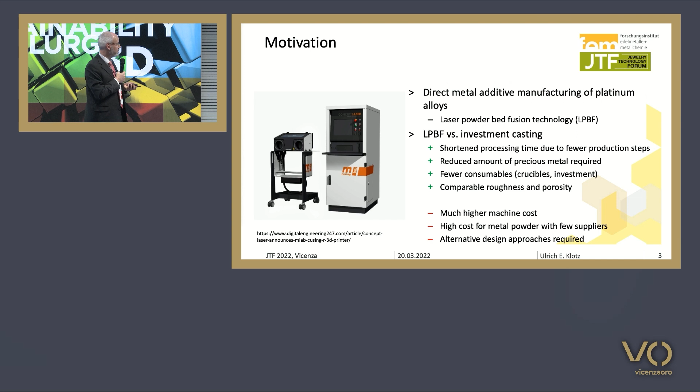So what did we do in our study? We wanted to know about the effect of the alloying composition. To study this, we used sheet material. We prepared small metal sheets that we put into our machine, and we applied laser tracks on these sheets.

This is much easier than producing a powder. Producing a powder means a very large effort - you need a relatively large amount of metal to melt - and therefore we went this way by using laser tracks on sheet material.

Then we used a commercially available alloy by C. Hafner to do some laser powder bed fusion experiments. We did a small parameter optimization, and I will show you an example about how the support structures are influencing the result that you obtain. We did a small optimization of such support structures, and of course we did the characterization by microstructure and porosity, and manufactured some jewelry items as examples.

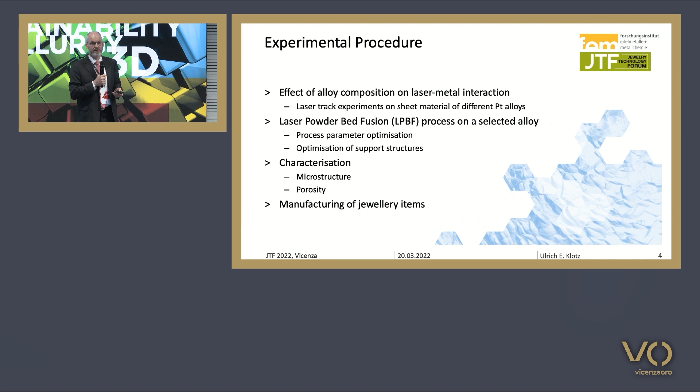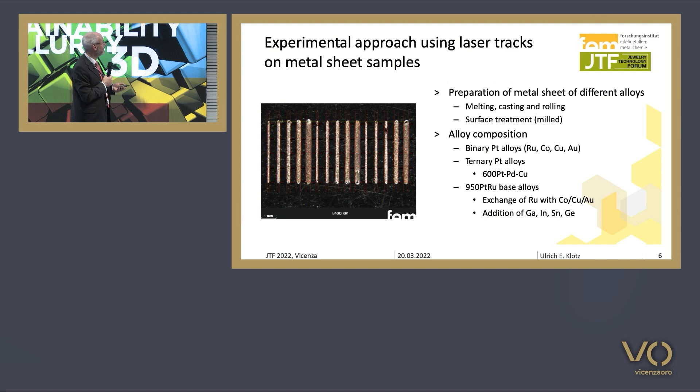So this is our approach using laser tracks. This picture shows you platinum alloy sheet with different laser tracks. We used different compositions, binary and ternary alloys, and several 950 platinum-ruthenium based alloys. You see the laser tracks have different thickness, which is depending on the laser speed. All tests were done at the same laser power.

So the smaller the speed, the wider the laser track, because more energy per time unit is applied onto the material. We measured the width of these laser tracks, and also did cross sections to measure the depth of the laser tracks.

Of course, the way the material reacts depends on its physical properties - the melting range. Usually the lower the melting point, and the wider the melting range, the wider and deeper the laser track is. The same is true if the reflectivity is influenced, or if the thermal and electrical conductivity is influenced by the alloying elements.

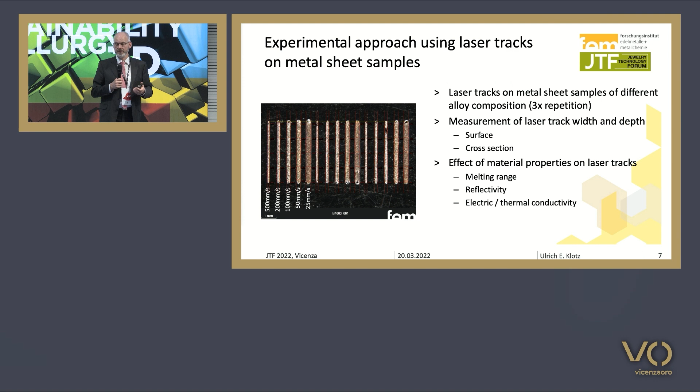Here's an example of how the line width of this laser track depends on the laser speed. We see what we saw already in the picture, that with increasing laser speed, the laser width is decreasing, and the process gets more stable, because the scattering - shown here by the color range as maximum and minimum values - is reduced. Here we see a cross section: the sheet material, the deformed sheet material, and here you see the cross section of the laser track.

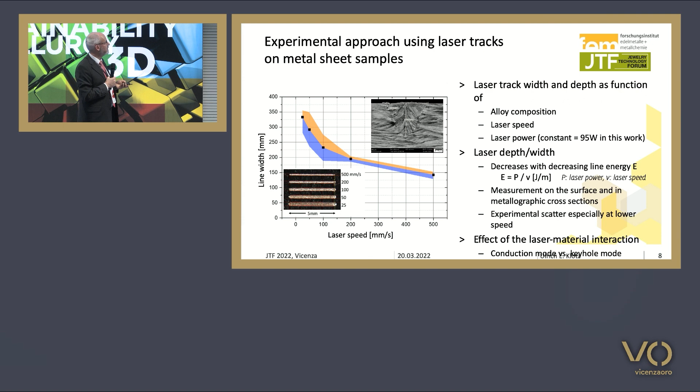So we measured these values, and we see an effect of the laser material interaction. There are two principal modes that are distinguished: the conduction mode and the keyhole mode. I will show you an example of how this looks exactly.

Here we see a very small laser track with low depth. You see the scale is 40 microns. This is a typical example for the conduction mode, done in a 600 platinum alloy with palladium and copper.

If the copper and palladium ratio is exchanged, here we have 300 palladium, 100 copper, and here 100 palladium and 300 copper. The copper-rich alloy shows a much deeper laser track. This is a typical example of the keyhole mode, and here the scale is even higher, so this laser track is really much deeper.

If we plot the width and the depth, the blue points are the depth determined from the metallographic section, and the orange points are the width. We see the width is more or less constant, but the depth is increasing, with a maximum at around 20 to 30% copper in these platinum, copper, palladium alloys.

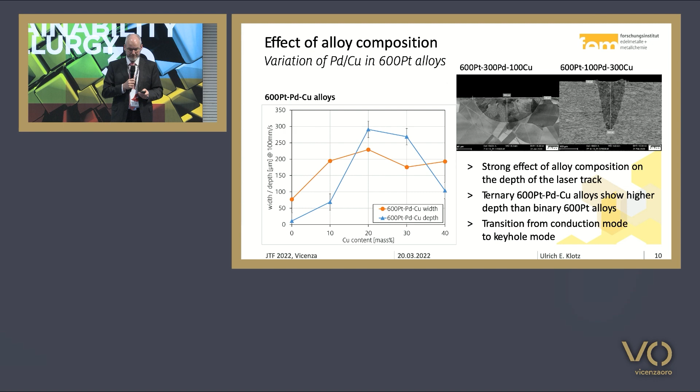So we see that the alloy composition has a strong effect on the depth of these laser tracks, and this is important because we have to melt layers together, so we have to assure that each layer is melted perfectly to the layer below. But if the energy input is too high, we can get porosity inside the material during the keyhole effect. Now here are some other examples.

We used several ternary alloys based on 950 platinum ruthenium. In this first graph, I show some examples with high melting additions. We used copper, cobalt, and gold, replacing some of the ruthenium. On the left side is the platinum ruthenium alloy, and on the right side are the platinum copper, platinum cobalt, and platinum gold alloys.

If you look at the triangles, the depth is not affected by copper, but we see an increased depth if we add some cobalt or gold to this alloy. We have not fully understood the physical reason for that, but I think it's an effect on the solidus and liquidus temperature that results in a certain melting range by adding these alloys.

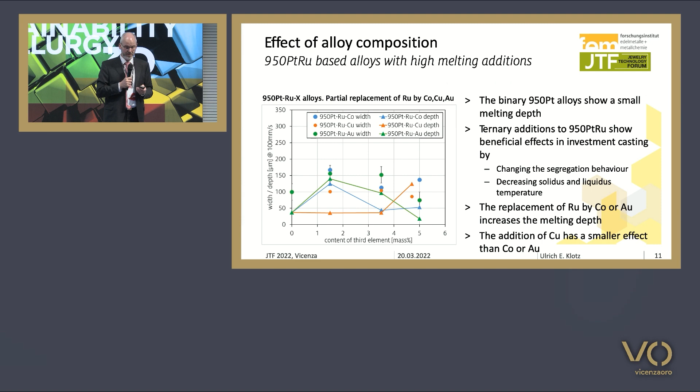So I think these are interesting results when it comes to fine optimization of the alloy composition for such applications. Now, if we use some low melting alloy additions like gallium, indium, tin, germanium, or zinc, we get very different effects.

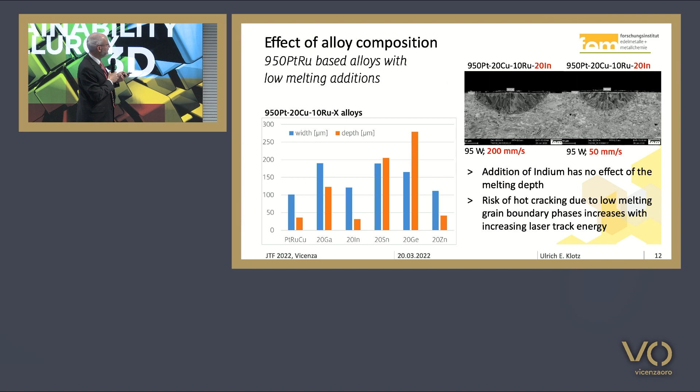We also see this here - there's very little effect. But other alloying elements like tin, germanium, or gallium have a very strong effect. We get this keyhole mode if we add germanium. In the case of gallium, we also get the keyhole mode, and we get a lot of cracks.

So there are some critical alloying elements. We heard about the age-hardenable alloys in the presentation of Chris Corti that contain gallium. I suppose they might be critical in processing with laser powder bed fusion or SLM, because they lead to so-called segregation - certain elements concentrate in the liquid phase and strongly reduce the liquidus temperature, meaning a liquid phase remains and results in cracking if cooling is continued.

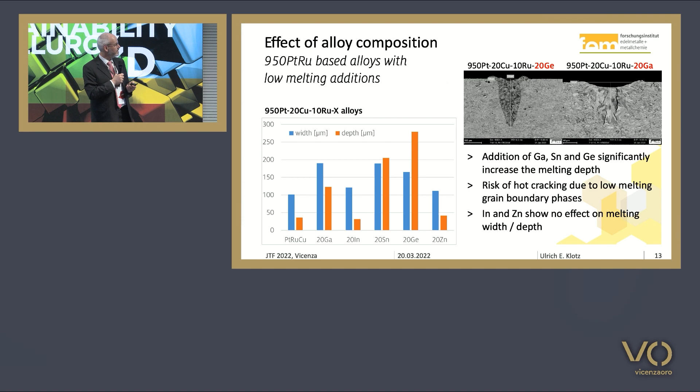However, indium and zinc show no effect, which was a bit surprising for us, but that was the observation we also confirmed when we worked with alloyed powder. So in the second step of the study, we used alloyed powder.

It's a commercial alloy powder, platinum gold indium alloy by C. Hafner in Germany. From this alloy, we built little test parts - a wedge type sample with some wires of different thickness, and a small plate with different angles.

We wanted to simulate some structural features of jewelry objects, and there we did a parameter variation. You see that depending on the parameters, you can get very different results in terms of porosity.

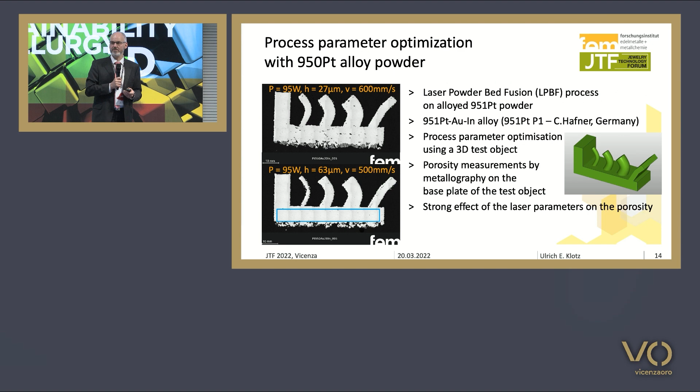We determined the porosity by looking at this blue area marked here, and we measured the porosity by optical metallography. This is a plot of the porosity as a function of laser parameters.

We changed the laser speed and measured the porosity, and we also changed the so-called hatch distance - the distance between two laser tracks. The laser goes forth and back to scan an area, and that distance is called hatch distance.

We see that the hatch distance has actually a quite strong effect on the porosity, especially at higher laser speeds. With decreasing hatch distance, the porosity increases, and this is probably due to overheating, because more material is melted several times.

While an increasing laser energy is also increasing the porosity, and increasing laser speed is also increasing porosity, because if the speed is too high, the energy is missing.

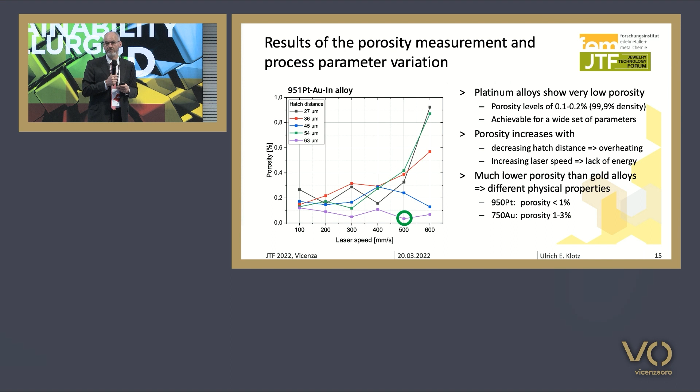We heard also in Chris Corti's presentation. And the porosity is also much lower compared to 18-karat gold, where with our machine under comparable conditions we achieved porosity levels of 1 to 3%.

So now we built some ring samples, some typical jewelry samples for stone setting. We used this type of support structures. So here you can see our small test piece. And if you look carefully, you see that something is wrong here at the right side of the ring, but only on the right side.

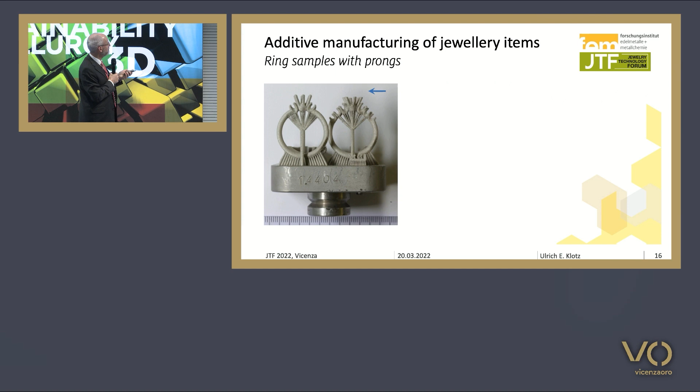So if you look in detail, we see that the surface is porous here, and some material is missing. And of course, this is a non-acceptable defect. We looked at the surface, made a build job, and interrupted here at the critical height, then looked at the surface of the ring shank.

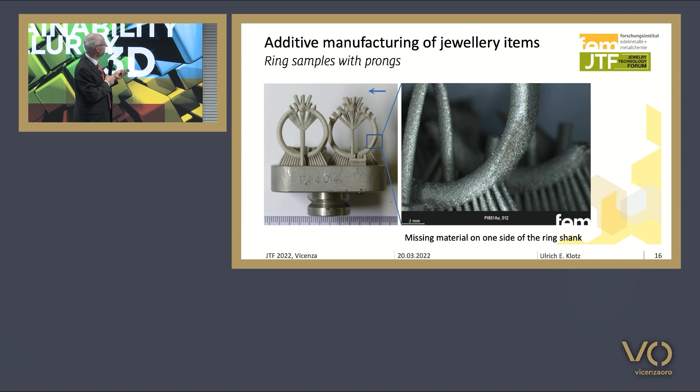This is shown here in these pictures. So here the left ring shank looks very good. The surface is perfectly lasered. There is no roughness, very low roughness. While on the right side we see so-called balling.

So we get little droplets of melt. We get a large porosity. If we look at the cross-section in the metallography, we see very large pores. And this is a clear indication of overheating. And we were wondering why this is the case, because both sides were processed with the same parameters.

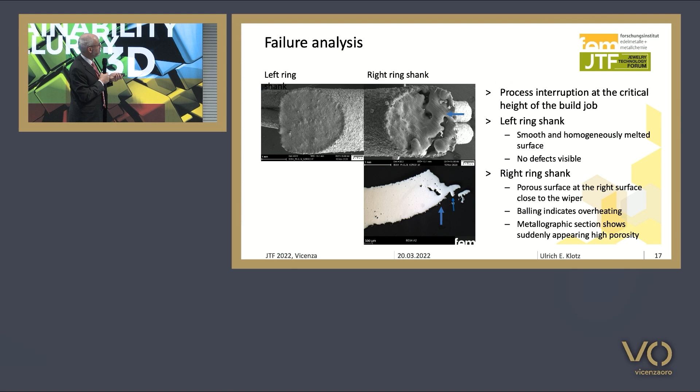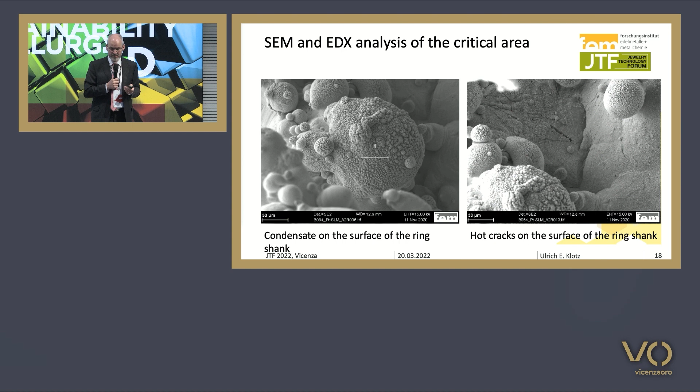And at the surface, we also see a certain roughness. So if you look here at the surface, we see a very porous, spongy surface. It looks like some material was there as a vapor and condensated on the surface. And we also see some hot cracks, which can occur as an effect of overheating.

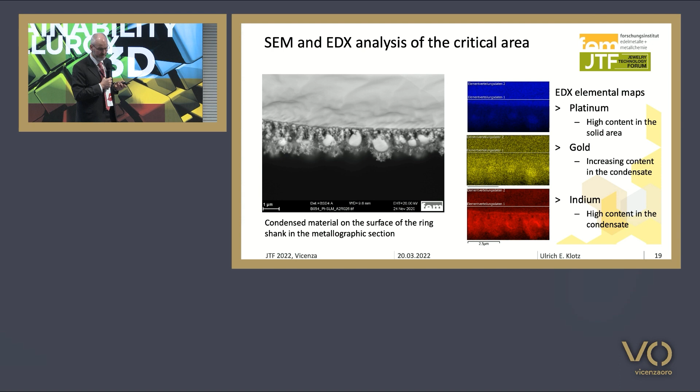This is the condensate in detail, how it looks. And this is an elemental map, so it shows the distribution of platinum, gold, and indium. So all elements are present in this condensate. It's clear that it's coming from the alloy, and especially the indium, which has a very low melting point, is concentrated. So this again confirms the overheating of this area.

So why is this happening? This is our 3D model of the ring with the structures, and on the right side we see a sketch. We applied the powder from the left with a wiper, and we also start lasering from the left. We see that on the left side when we start lasering, due to the geometry, there is solid material below, so the energy can be dissipated into the ring shank, while on the right side, in the very beginning of the laser process, there is a powder bed below this region.

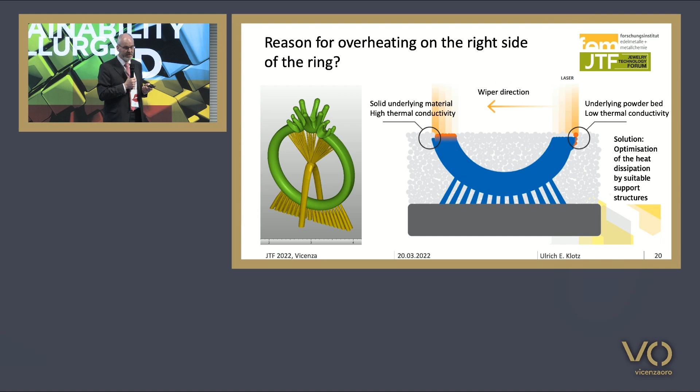So the energy cannot be dissipated, and therefore we get this overheating. The solution is to optimize heat dissipation by applying suitable support structures. To do this, we analyze the ring geometry. Usually, a rule of thumb is all areas with an inclination lower than 45 degrees need support, so this would actually only be this area.

But we found from the analysis that on the left side about 60 degrees needs supports, and on the right side more than 70 degrees angle needs supports to avoid this overheating. So we need much more supports than just supporting a 45-degree angle. And if we analyze the CAD file for regions that show angles of 60 or 72 degrees, we mark them all in red, and we see that we need more supports on the right side compared to the left side.

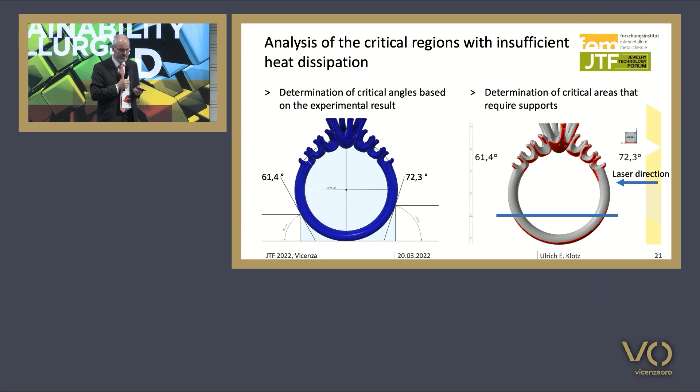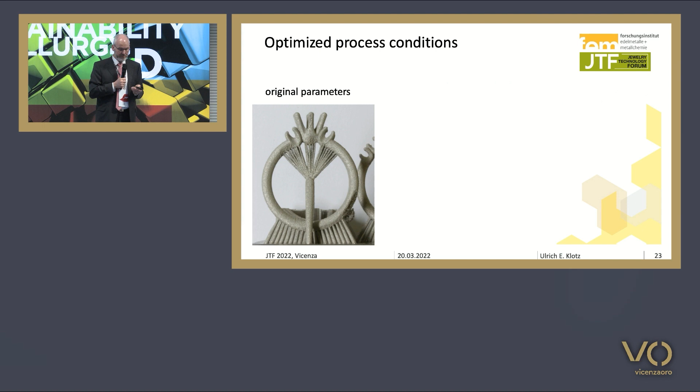So we applied such supports, and this was the original parameter with the defect here. Then we used the new supports. You can see them here, and this could fully avoid the problem of the overheating on this side of the ring.

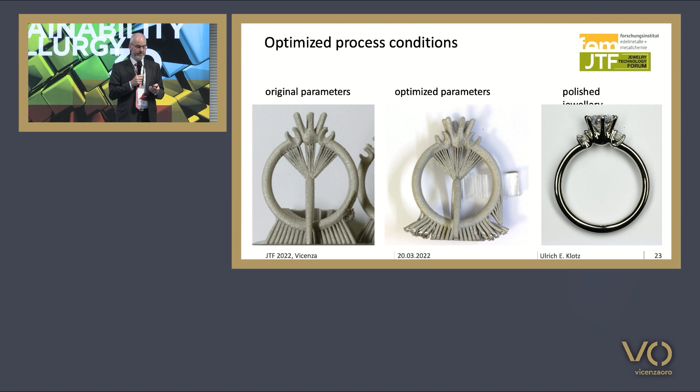Now let me summarize my presentation. Such laser track experiments are good to easily evaluate the effect of alloying elements, because you can easily prepare them and not much material and effort is needed. We see that some elements are critical. Gallium, tin, germanium, they increase the melting depth. They are critical in terms of hot cracking.

And in terms of the alloyed powder that we used, we found that we can achieve very low porosity levels over a wide range of process parameters. However, it appears important to do a proper heat management of the part, so it requires careful analysis of which regions need support structures, and this is especially important if you have many different parts that you want to produce. So there are rules of thumb, but it's better to test them if they are working for your particular part.